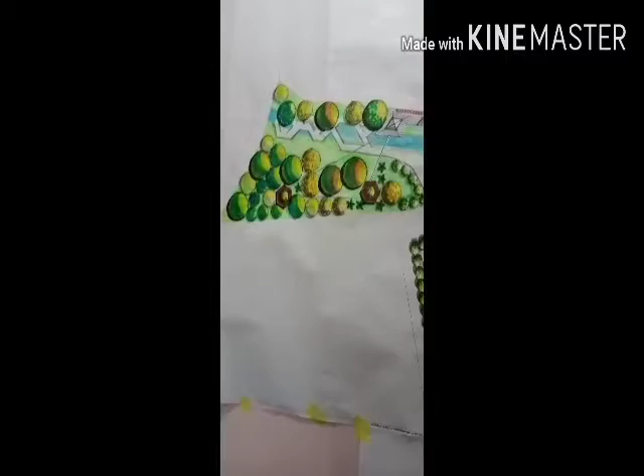Okay, so this is the site as an overall—how it looks. Let's go one by one to all the spaces found in this master plan.

Okay, so this is the main car park, which is easily accessible from the highway. Take a left and another left to access the main area of the park.

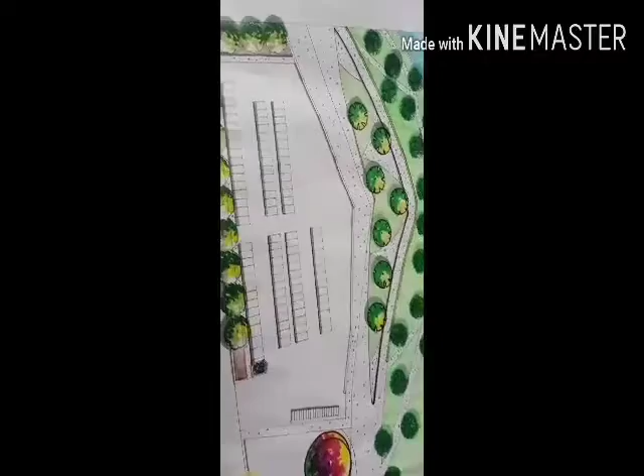This whole area is called the Green Infant. The word 'infant' means a starting point for everything—for growth, for development—and serves as a reference point to everything that follows. I feel this main car park and its surrounding should be the starting point, a reference point, for users visiting the park.

So let's imagine ourselves as visitors. Right after parking our car and heading towards the park, there's an overhead space about 5 meters above ground level.

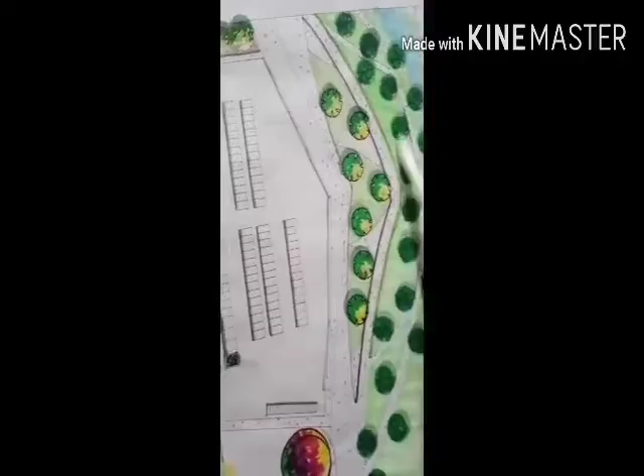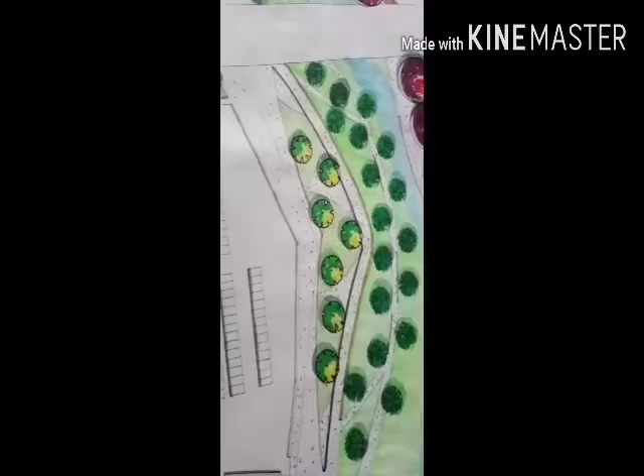This is the ground level right here, and this design is inspired by the edges of the emerald gemstone, as well as inspired by the arc from Bandar Rimbayu by Garis Architects—one of the upcoming and popular designs found in Malaysia.

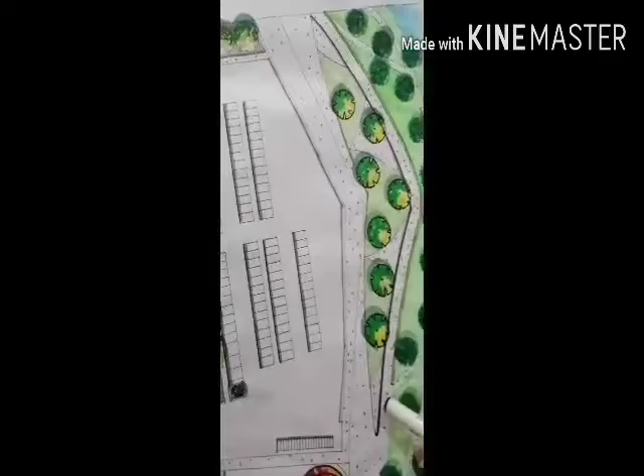Right here we can find lawns—these green spaces are lawns with some trees, including the Ficus benjamina tree—and these are the walkways.

This is where the main access starts, and these are also spaces where people can gather, talk around, and spend time.

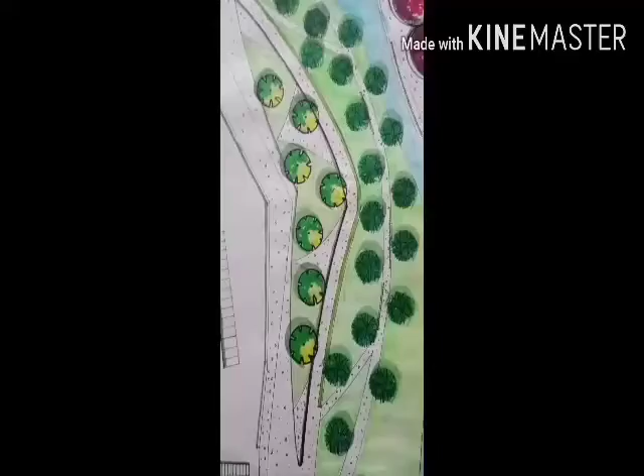From here, I have proposed some climbers that weep down to the ground level—the Old Man's Beard plant, which can grow up to 6 meters long. From here we can also get a view to the opposite side of the site.

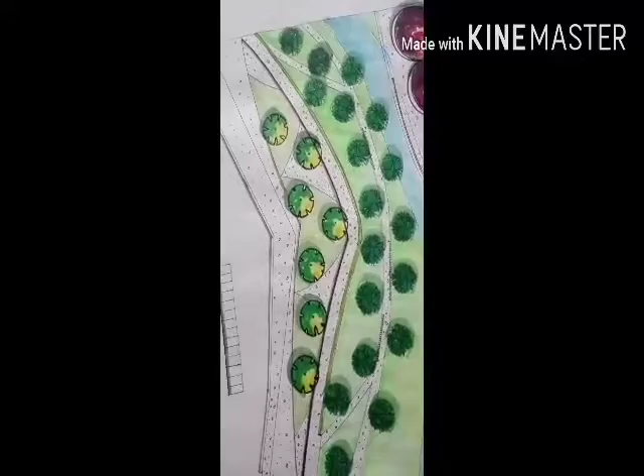Okay, let's go to the top part from this main area, the Green Infant. We shall move on to the Forest Revive.

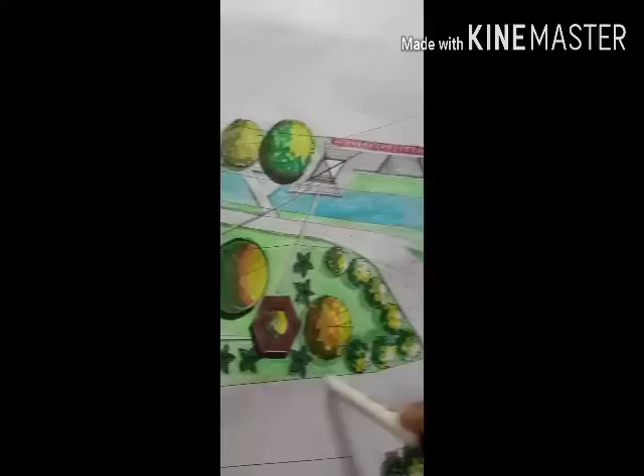This is the Forest Revive area, the nature trail area. Now I would like to rotate the camera for a better view.

Forest Revive is a space where users get an experience where a modern, friendlier touch is given to what would normally be a restricted area like a forest. We can't easily access a forest, but by proposing a friendly design hint for the site, it enables people to engage with the forest and also the river itself.

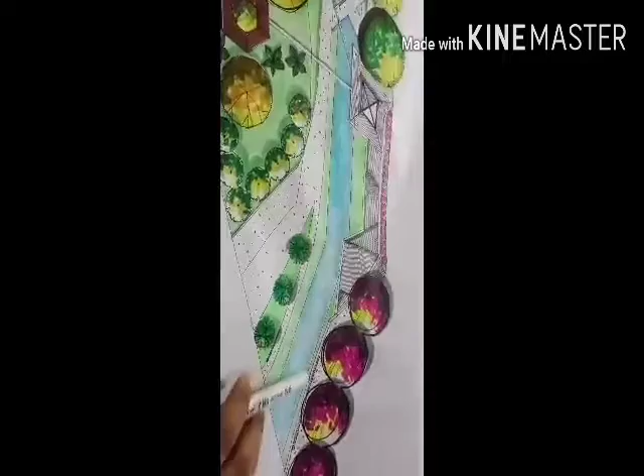So the Forest Revive is a platform—a decking, a pavement with seating—followed by decking that is a bit higher than the pavement, with some trees, including the Brownea grandiceps tree, to provide shade for people when they walk.

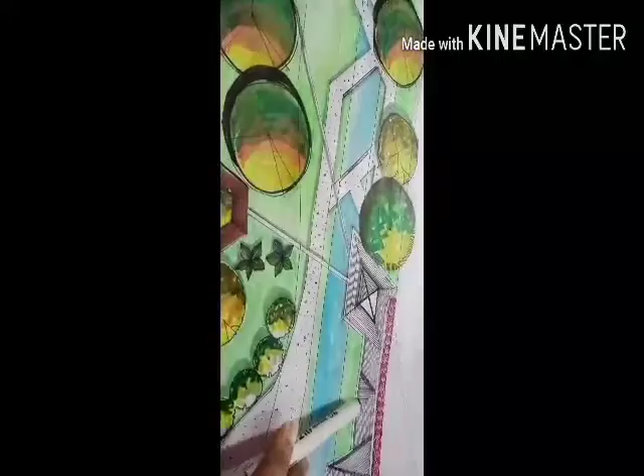This is a deck where people can walk around, get the view, get fresh air, and experience some adventure as the ground level changes from the lower part to a higher altitude.

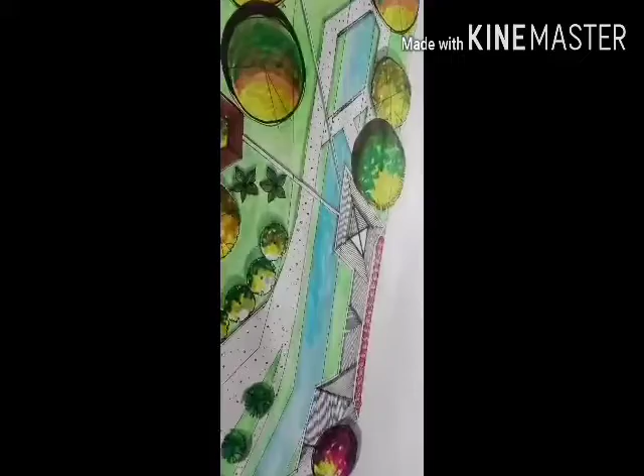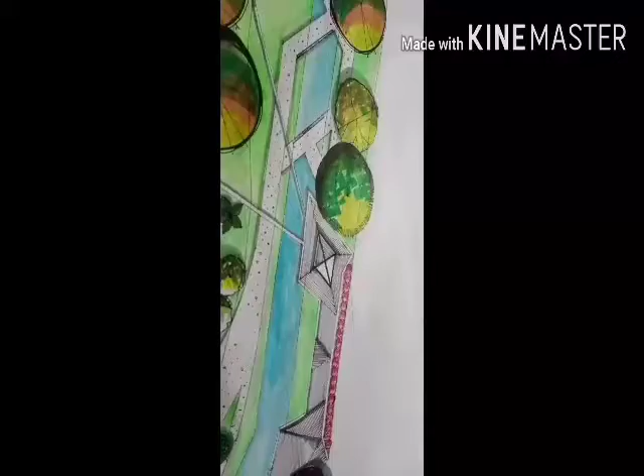Now this is the space where people will gather to actually participate in an activity which is a bit more adventurous for visitors who will come. This is actually a connector from the forest revive to the nature trail area, a canopy walk proposed to connect both areas, and this activity is only for those with normal capability.

By the way, the circulation around this whole master plan doesn't have any staircase. It only has a ramp type of feature, for the purpose of universal design, to cater to the needs of the disabled and the challenged.

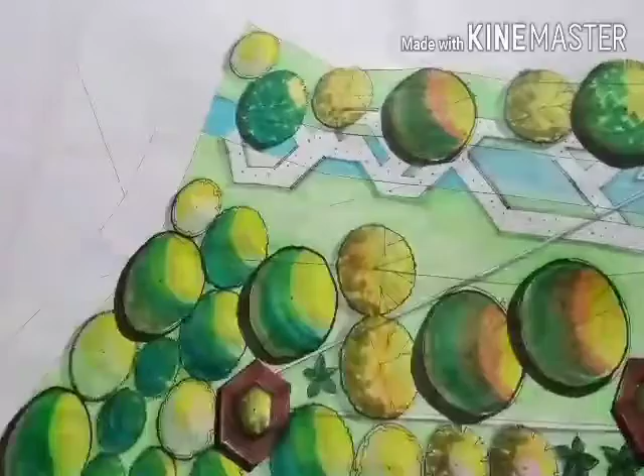Coming back to this part, these are actually nodes with the pokok pulai in the middle. The node surrounds the trunk of the tree, and its main connection is from the forest reserve area. From this space we connect to other spaces, and users can move in this triangular motion to have an adventurous experience, engaging themselves with the forest while having a view towards the greenery and the other spaces around.

So these nodes are built depending on the trees, and none of the support system touches the ground. The trees proposed around this area are from the initial planting - I thought maintaining them would give a better forest type of approach - but there are also other trees I proposed, like the Samanea saman, palms, and so on.

Moving on to the next space, which is the nature trail. It can be accessed from the Green Infant via the primary and secondary circulation, and it just moves into the space.

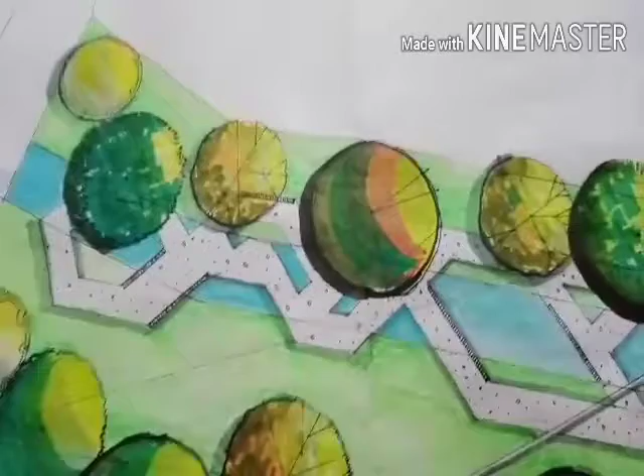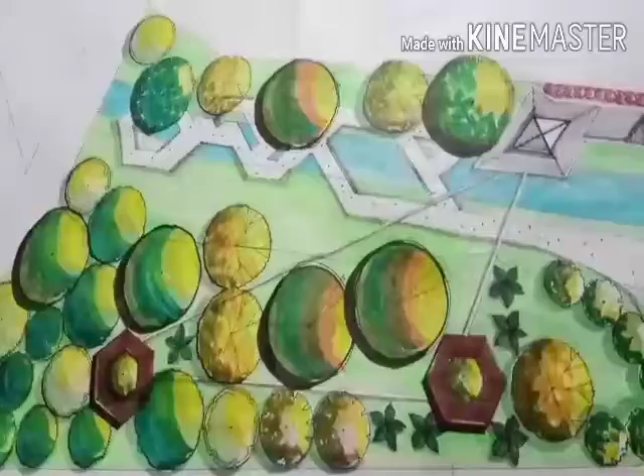I feel this is one of the features that engages people really well and really close to the river - or I'd call it the gemstone, the emerald. So people learn to appreciate more the nature found in that space, and this is one of the areas where the biodiversity of this Kuyoh river is potential to be maintained, because I didn't propose much new design to this area, so the existing ecosystem can be maintained.

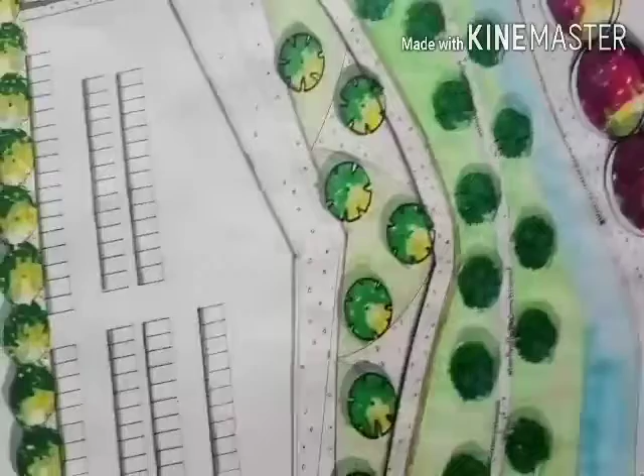Let's move forward to the more interesting parts of the site. This space in the green infant itself, you can notice there are a lot of trees. Walking through this path - this is the ficus lyrata tree - gives a more calm and soothing experience to the users. And if you notice, there are a lot of benches here and there in the circulation.

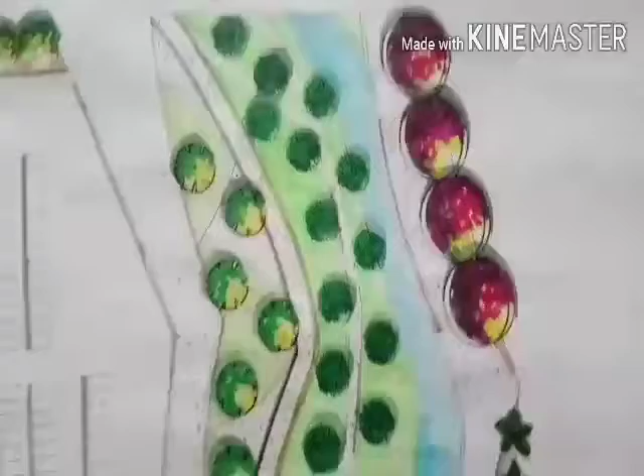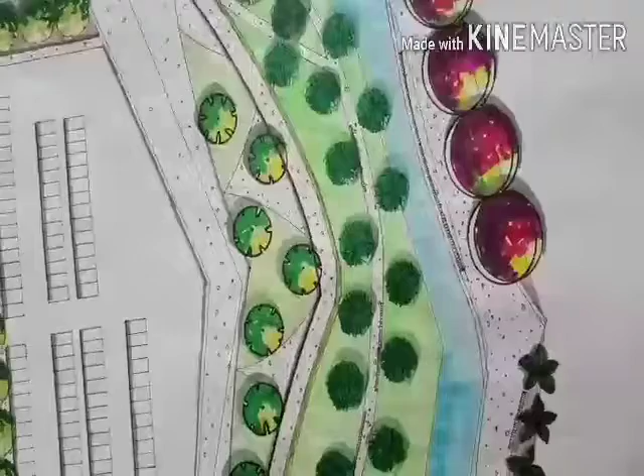The benches enable visitors to have rest. It's like a rest and go policy, and all the benches are not short, they are very long. Now it's the pandemic period, so we have to consider social distancing in our designing as well. This is my first time doing this, so I hope it makes sense.

Moving forward, this is actually the green infant. This is a more common type of space, designed in a way where it could engage people with the nature of the Kuyoh river.

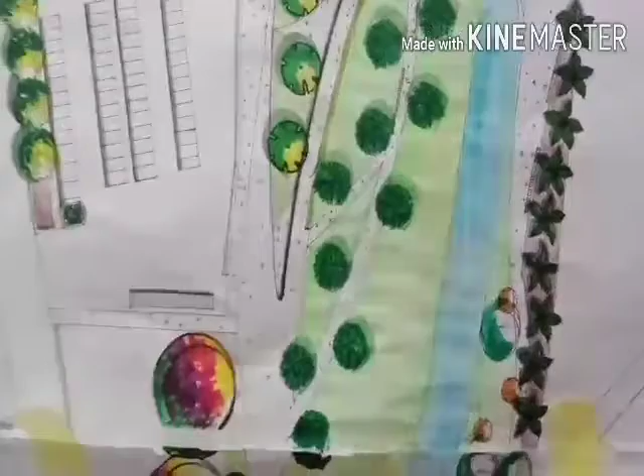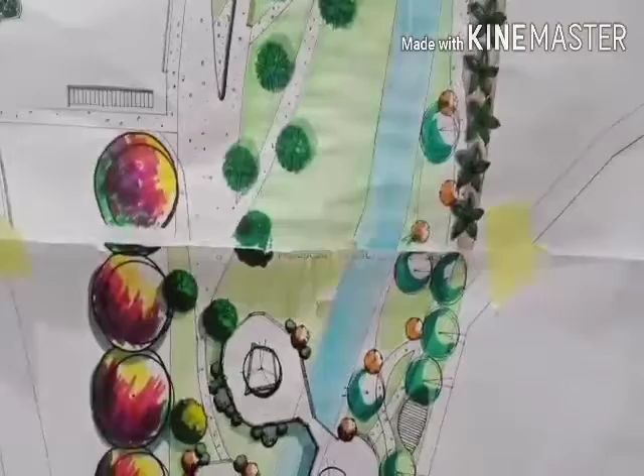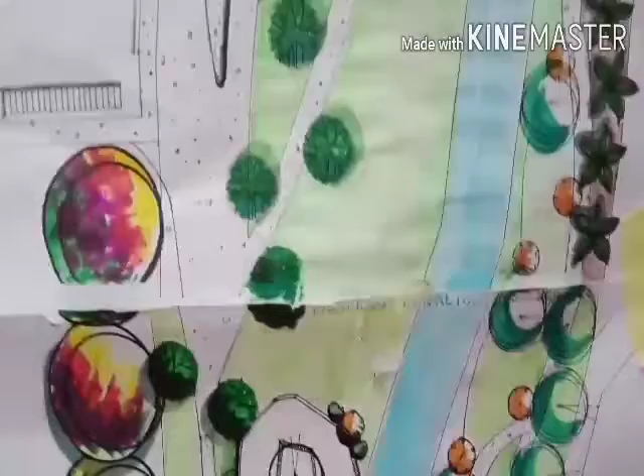It can be used for picnics, for children to play around, and there's no specific activity for any age group to be carried out over there, but I'm just listing some common activities that can be carried out. There are some trees there, the Terminalia mantaly tree, and some shrubs. And we shall move on to the focal point - this is the focal point.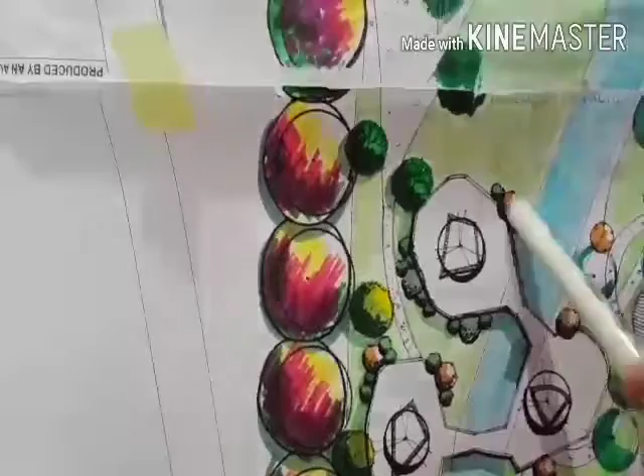It's called the forest home. To get access to the forest home, there's actually a long ramp from the ground level towards the focal point. This feature is around 12 meters above ground level.

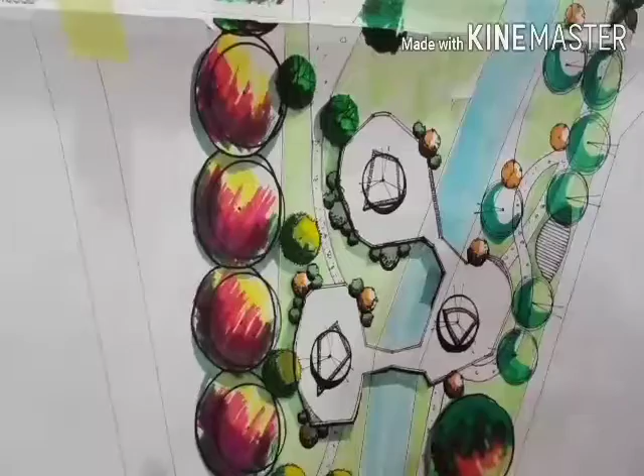It's a space where people can walk around or have a seat to talk to each other, and it's a nice place where you get a view towards the whole site. Different ground levels give different types of experience to users, because the canopy walk cannot be approached by the disabled, but this one can cater to their needs, when they can go for a high altitude visit, then go back down and continue their journey towards the other spaces.

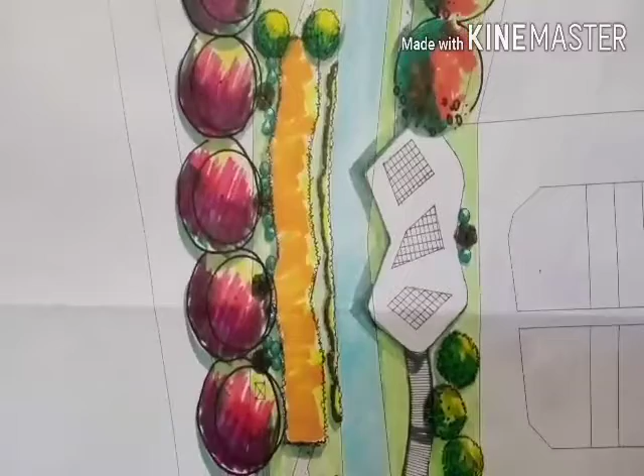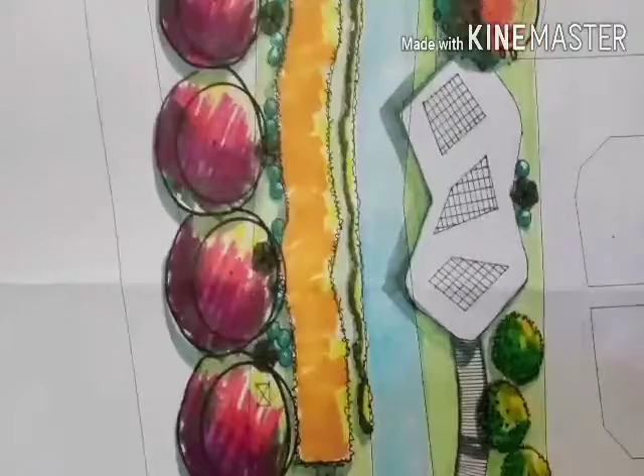Moving on, this is one of the interesting parts of the site, called the Gem Cafe. It's environmentally friendly in a unique way, based on solar power, and it connects its path to the other side of the site, which is the Emerald View Eatery.

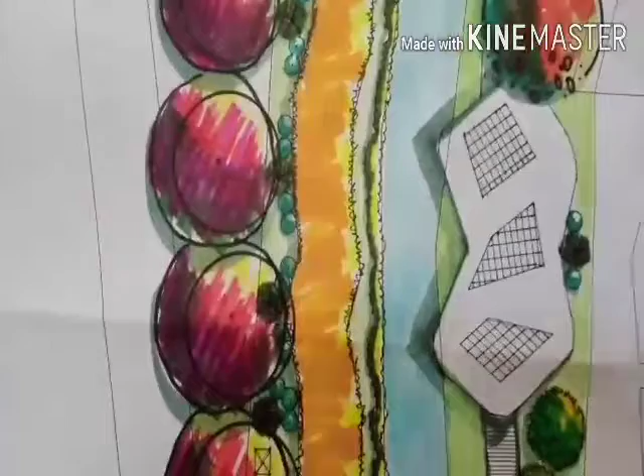The cafe is for very minimal type of meals and socializing purposes, and people can also carry out office work or group discussions. It's very suitable for students and any type of people from any group, so they can spend their time here.

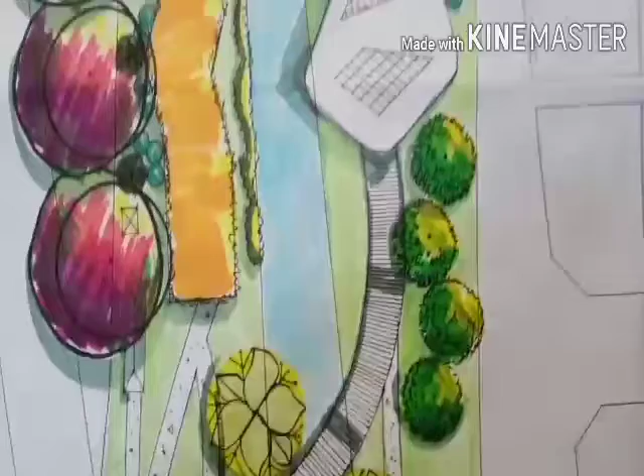These are a few trees - the Filicium decipiens tree - and there are hammocks in between the trees for relaxation purposes. I think it really goes well with the setting of the cafe.

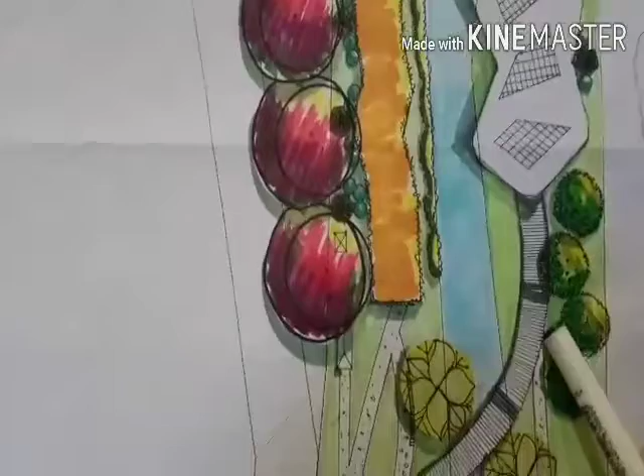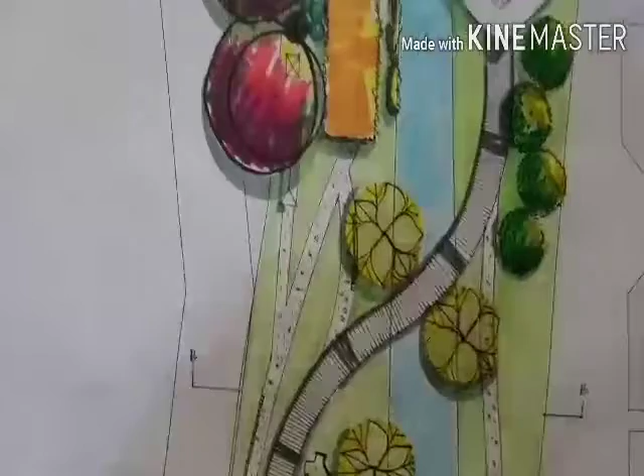There's a dual connection here, one going towards the Emerald View Eatery, and another going towards other spaces. I'll take the secondary connection first. We have the Weeping Willow tree here, which serves a good visual for this particular space.

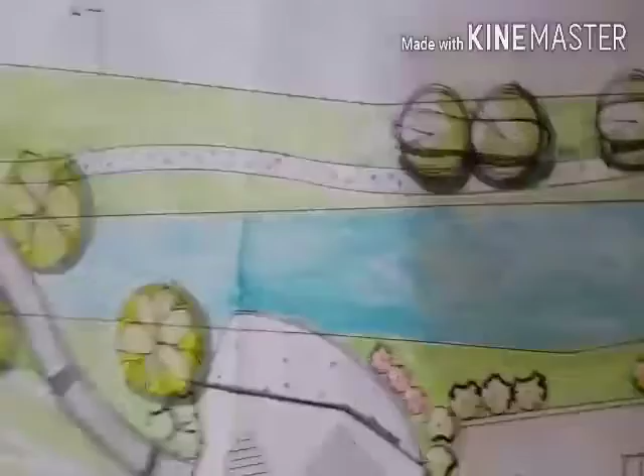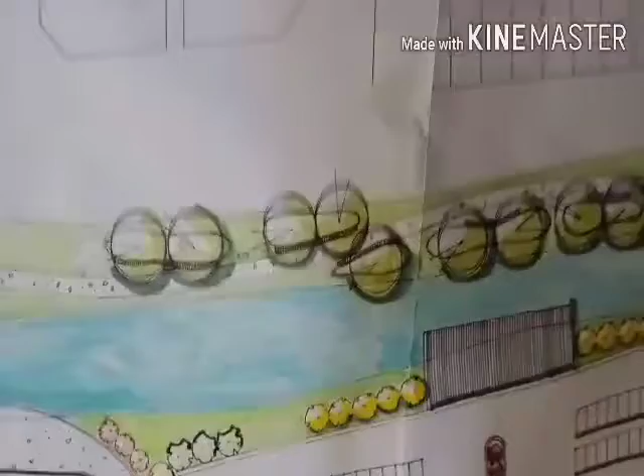This part here is left empty for a purpose. When you're walking and you don't find anything, you feel boring, so when this part comes up, a sense of excitement and curiosity comes. This is actually a rest area for people to relax or continue their journey to the next space.

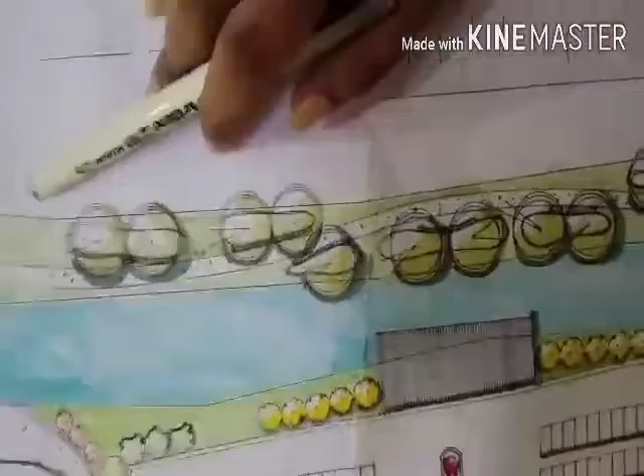These are berms of turf, and I have proposed the Terminalia mantaly variegated, which has a lighter color and a more contemporary appearance. I proposed that tree for this space, and there are benches here that connect with the berm, so people can rest and go.

It's a good space to relax, or if you want to carry out any task, with a nice view towards the other part of the site. It's a good space, and it goes along until we come to this part.

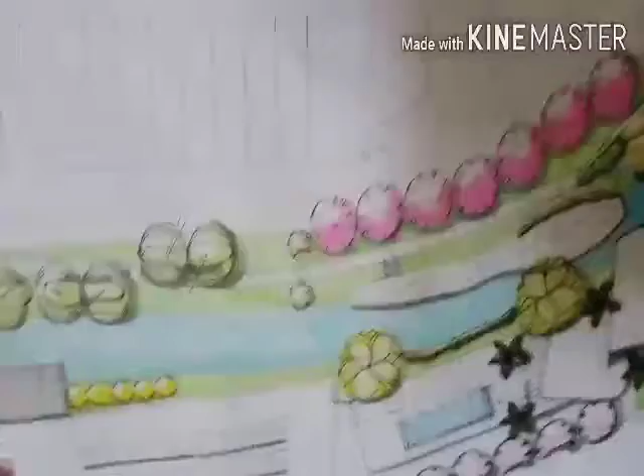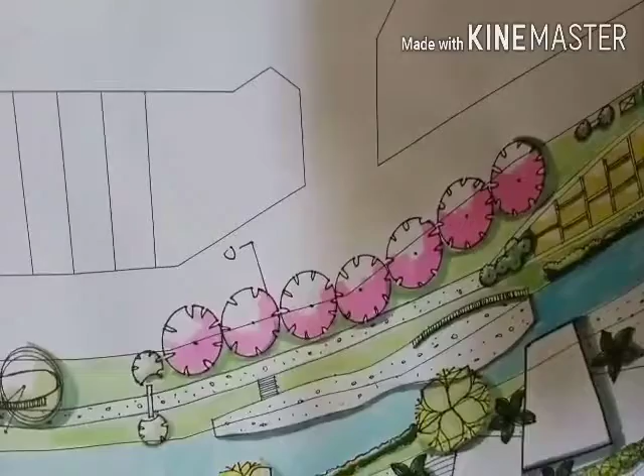This is actually an agribusiness area, which I'll explain later. Moving forward, these are plots for the residents to carry out gardening.

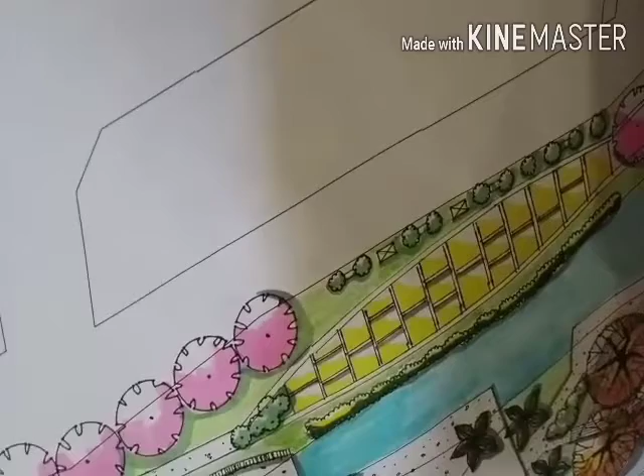When we went around the neighborhood to ask and find out what they actually want and how to utilize the space, some of them gave the opinion of having a community gardening space for all of them. So this space is particularly designed for them, and there's no specific irrigation method.

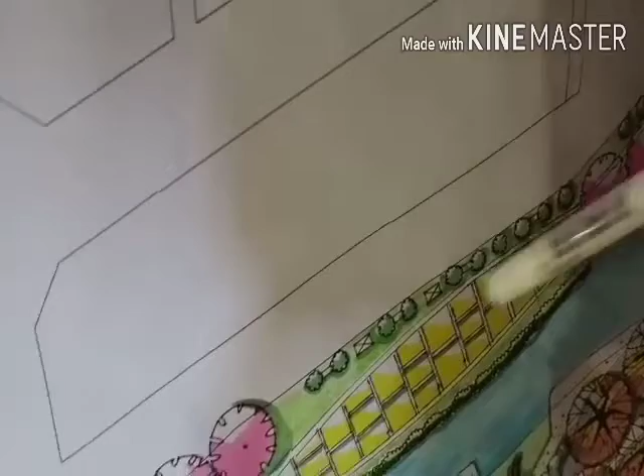I'll explain why - I proposed a few small basins here to collect rainwater, and people can get their rainwater from there to water their plots. The reason I didn't install an irrigation method is just to bring the human out of people, everybody.

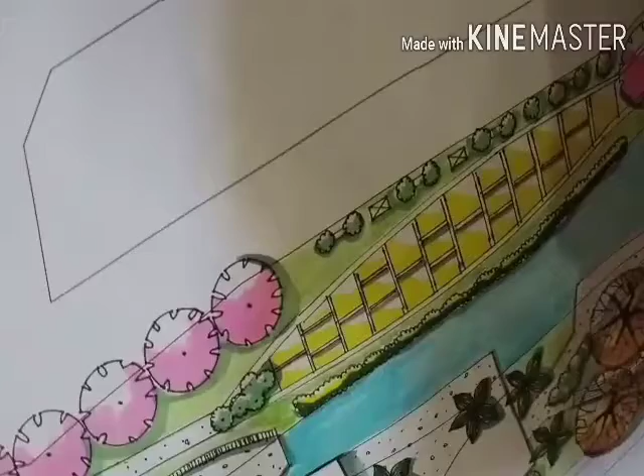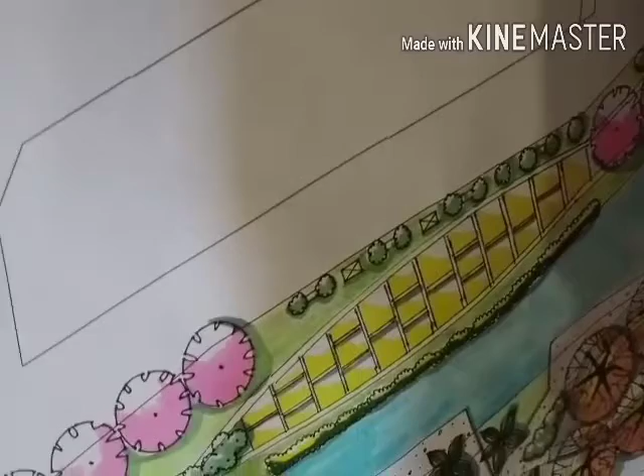How do I say... actually when we don't have something of our own, we try to communicate with people. So let's say person A comes and is doing his work here, and person B comes and person B's water runs out, and he asks person A, can I have some water from you because mine has run out? And their communication starts, and people start making friends.

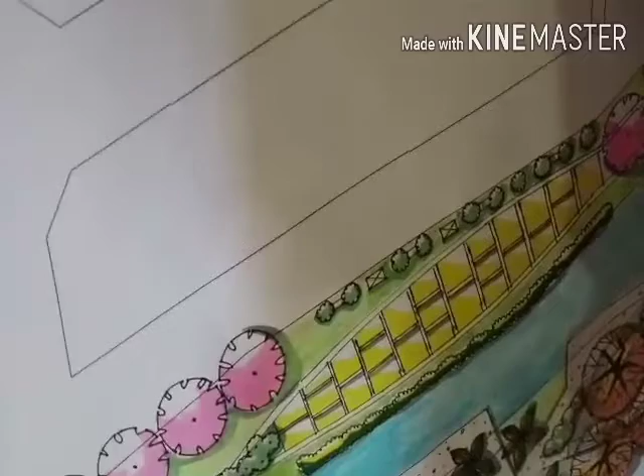Now during this era, people are very reserved and not wanting to make friends, and are exposed much to their phones and gadgets, so eye-to-eye communication is very less. I think this concept will help people communicate with each other and make the neighborhood more lively and share strong bonds with each other.

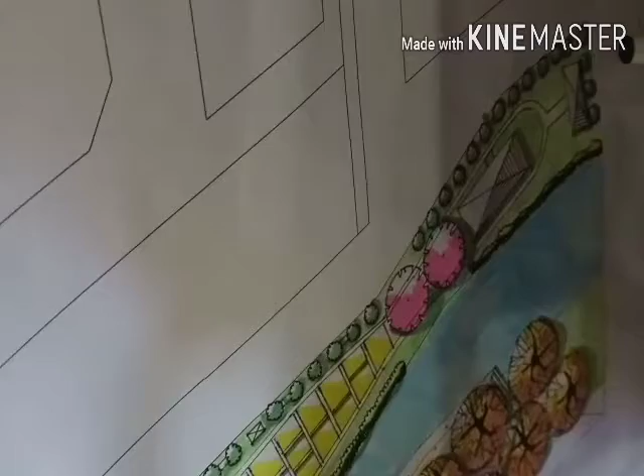There's a hedge here just for security purpose. And yes, this is the maintenance and garage, where people can get some tools.

Okay, so we will go where we started. We started at the Jam Cafe.

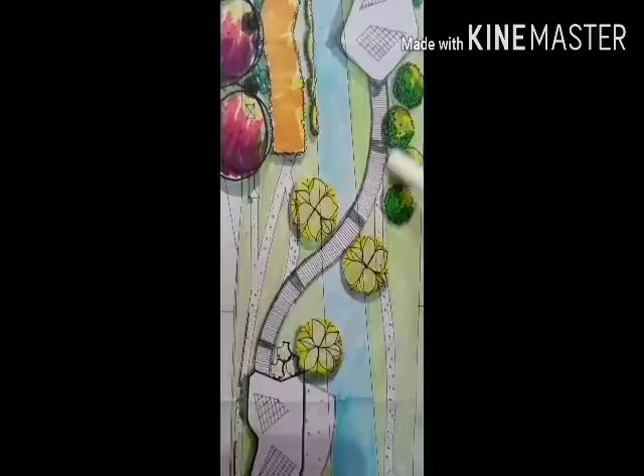So let's take the primary circulation here. This is the Emerald View Eatery, so people can have their meals and approach the river without getting wet. So this is the restaurant.

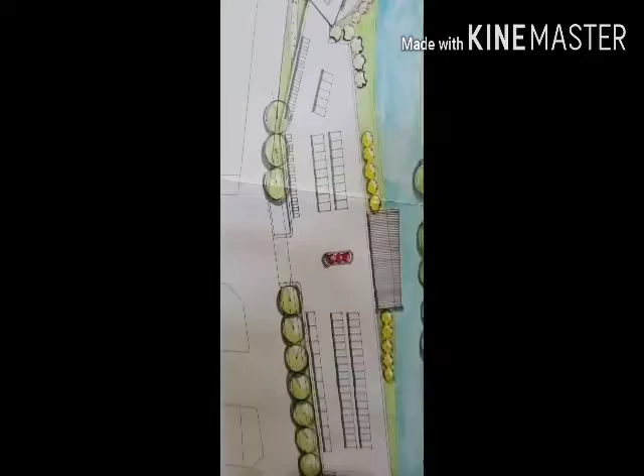Going forward, this is actually the second car park. I have also proposed parking for disabled people at the main parking and also the secondary parking, and there is also parking for motorcycles and bicycles, which is called the Reawakening Journey.

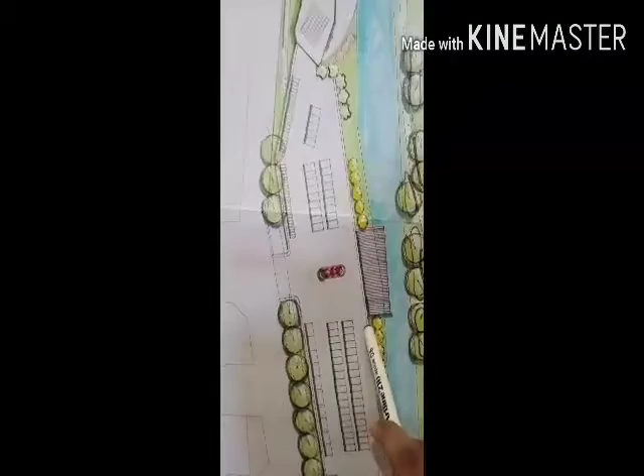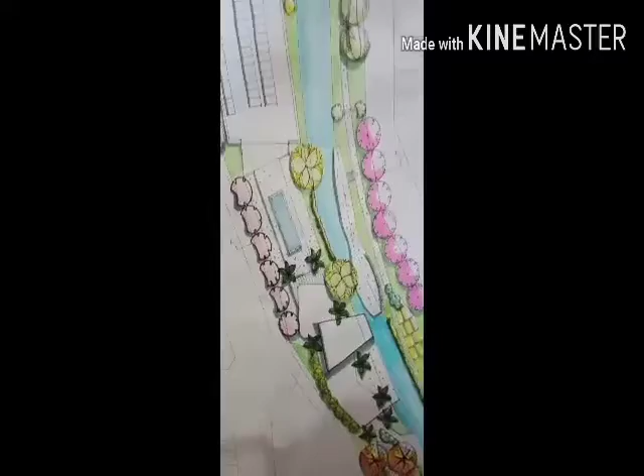So moving forward, this parking is situated here simply so visitors can get easy access to the next interesting space, called the Renaissance on the Kuyoh River. It's actually a pavilion, and we can have events in this spot.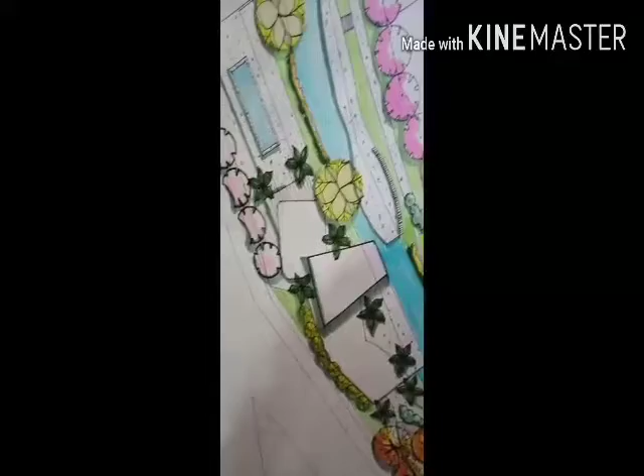This is actually a pond, and people can walk through some beautiful trees to greet the visitors. There is also a lake view from the pavilion. So these are potential areas for them to have their events.

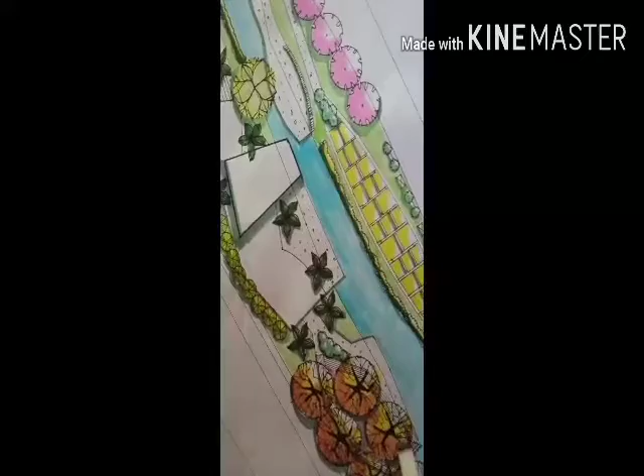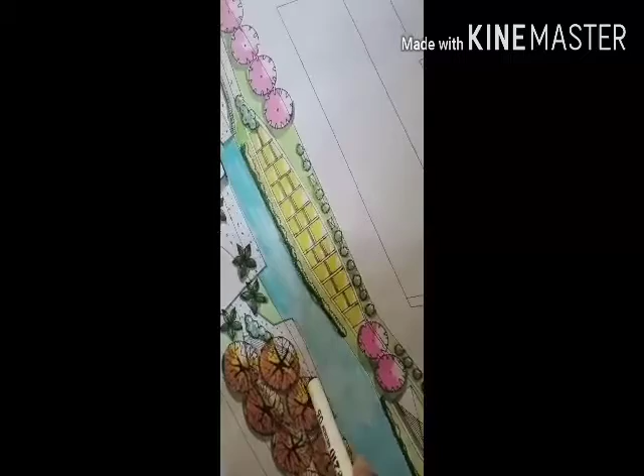And then from there we have a small garden here, which has two levels - this is the higher level. Here is a decking with trees in the middle, and there's something like a retaining wall here, so people can come from the pavilion to have a walk or get more of the experience of approaching the river. So that's it, I mark this as the end of the site.

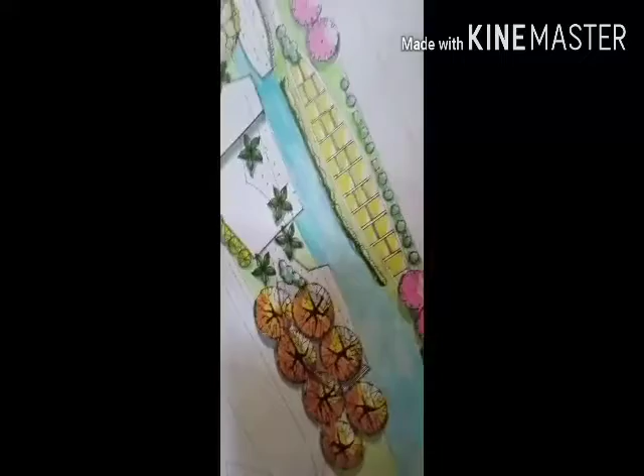So I have another thing to share. Remember we were talking about the Reawakening Journey - it's actually the circulation served for normal pedestrian purpose and also for bicycles. It can start anywhere, but the main one is over here, right under this overhead space.

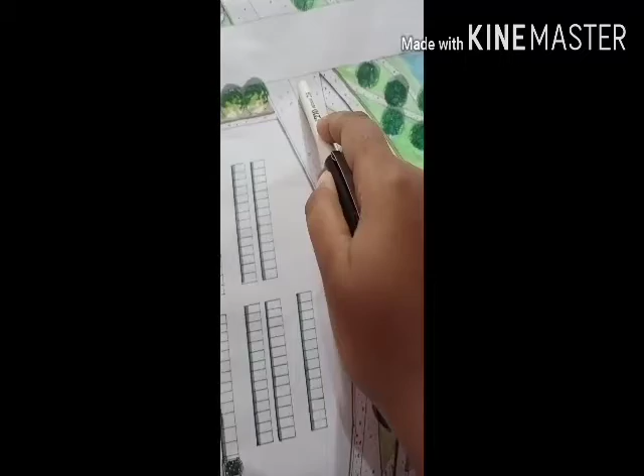There's a space for bicycle parking, and there's another one here also. So these two spaces can serve as bicycle parking, and it ends or begins at the secondary parking. So yeah, this is the site.

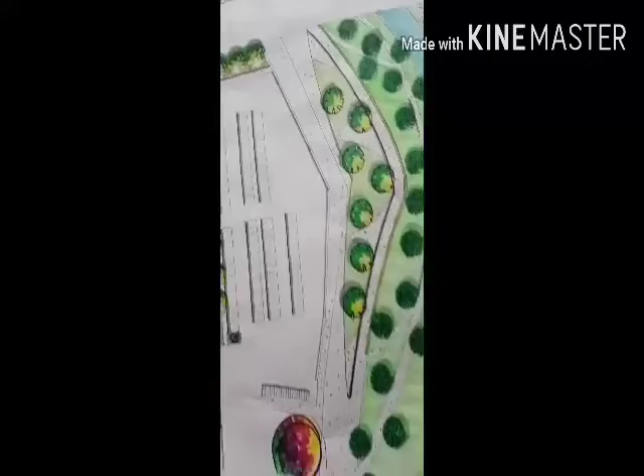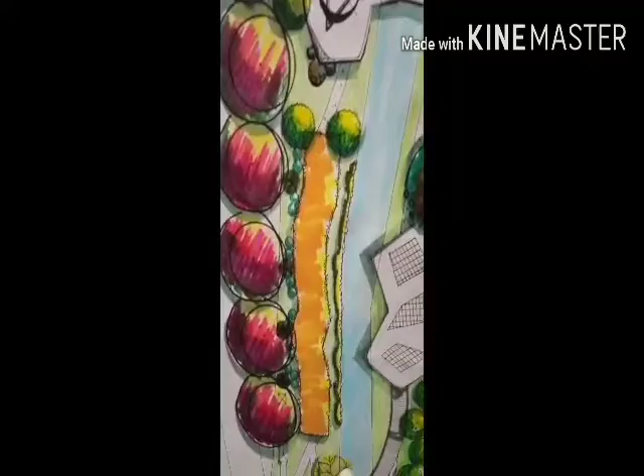Oh yeah, there's another space from the Emerald View Eatery - it's a pergola with some beautiful climbers with vibrant colored flowers, something like the Quisqualis indica. These are also Filicium decipiens trees. So it's a nice walk through the greenery, then crossing towards the focal point, the Emerald home.